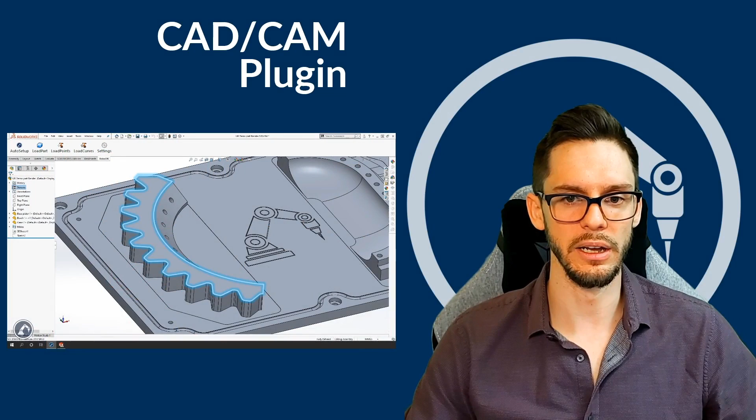So this is great. Here's a small example of how it works. So if you have the part, you can select whatever feature you want to import, in this case an edge, but as I said before, it can be the part, points, or the curve. Then you import that to RoboDK. You can then manage the tool orientation, approach and retract movements, IO activation, and other parameters. Then you generate the path and upload it directly on the robot controller to be executed just like this.

This is a video I did earlier this year, so you can watch it back on YouTube if you want to see it more closely. And as I said, one of the great things about this feature is that considering that you can import 2D and 3D sketches, you can pretty much draw any path you want on the part in your CAD software and import it to RoboDK. In my opinion, that gives you a lot of flexibility to create some fancy robot trajectories.

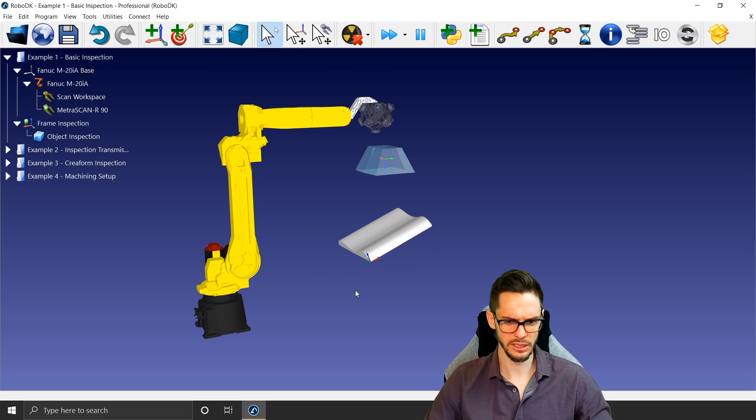So here's the task for this one. Let's say that we want to inspect this simple part. One way of doing that will be to manually create robot targets, right?

You come here, you reorient the tool, you say okay, just like that, somewhere like this, and I'm just gonna create a first target, then I'm gonna go forward, then create another one like that, and so on and so forth. But that won't be super fast and that won't be super precise either. So there's a better way to do that. So let's bring the robot back to home.

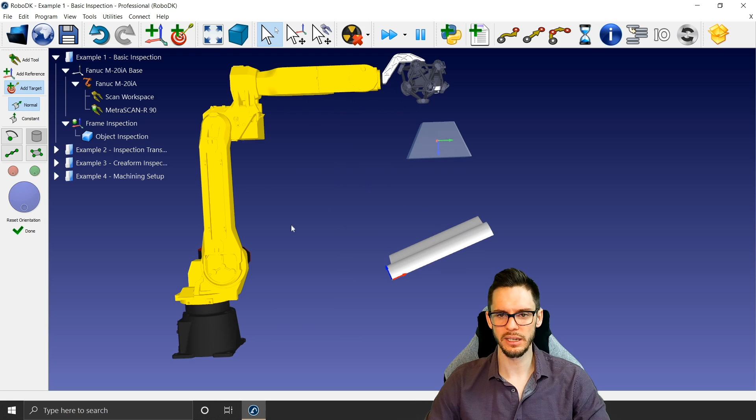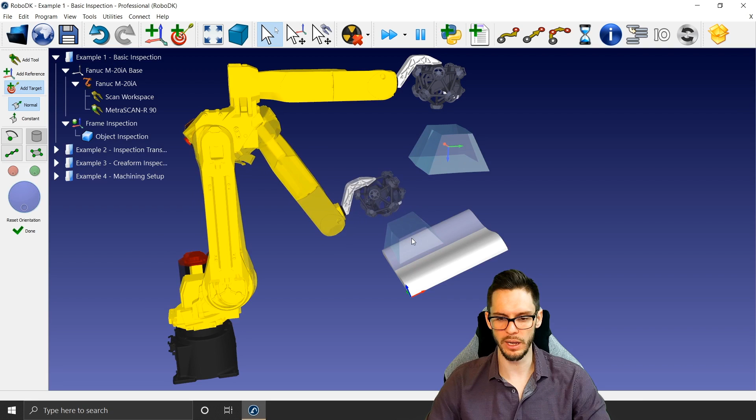Okay, so if you go in the main menu and you click Program, and let's say Teach target on surface, by default, these two options will be activated, so add target and normal. So we'll stick to them for the moment. You'll see as soon as I bring my mouse on the surface of the object, some kind of ghost robot and ghost tool will appear with a small TCP at the end, and as you can see, it always tries to keep itself normal to the surface here.

So if I just click, let's say right there, it created a target. I can click right here. It created another target. You can see those targets created in the station tree like that. I can come here, create those ones like that. And as you can see, in less time than it took me to create 2 targets the manual way, I already created 8 of those, and I'm sure that they are touching the surface and that they are normal to that surface. So okay, that's great.

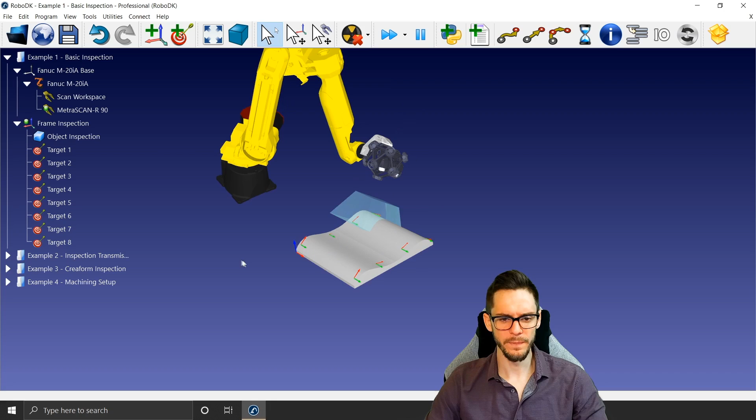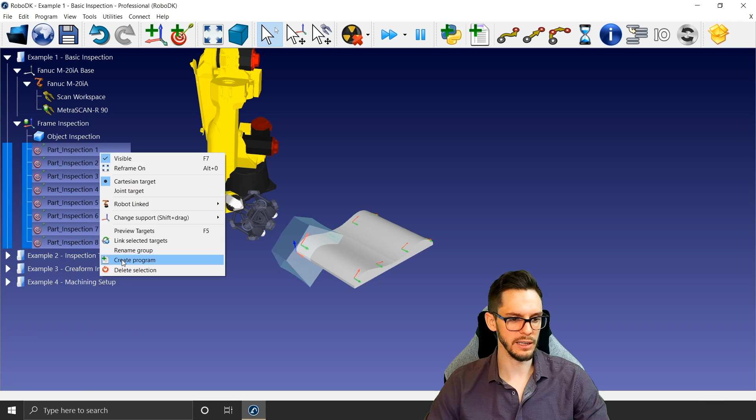Now we can create a robot program with those, so I can select them all. Let's just rename them first. So let's say part inspection. Okay, so it renamed the targets and it gave them a number. And if I right click, I can select Create program, and it will create a program for me. I can right click rename or press F2 to simply give it a name, inspect part, let's say.

And once I have this, I can right click on it and click Generate robot program to generate the real robot program that I need to send to my robot controller. So just like that here, I have the 8 moves that I need to do, and I have all the different positions right here in the registry. So this is an LS file. This is meant to be uploaded on a FANUC robot.

So if you've selected another robot, it will create a different file depending on the robot and the robot controller. In this case here, your robot controller for the FANUC may or may not accept the LS file directly. You may need to compile it to TP, so there's a way to do so.

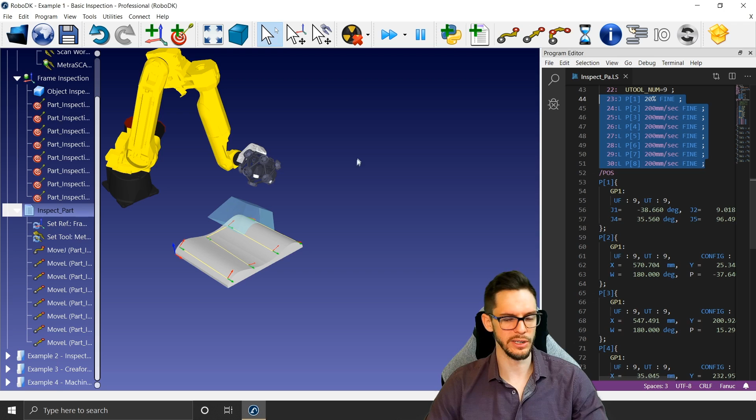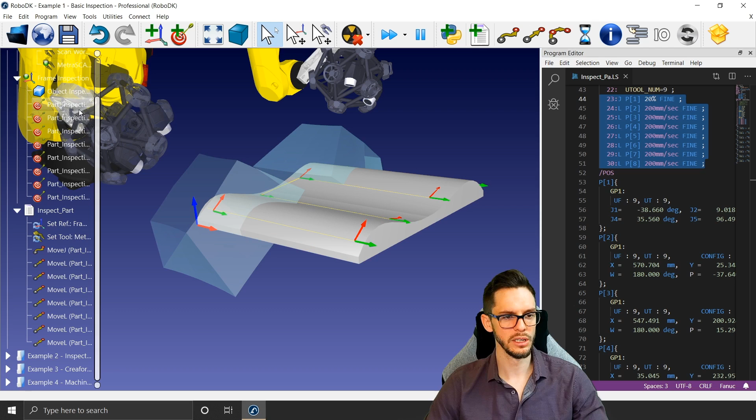Once you created your targets like that, you can modify their position either by holding Alt and using the different arrows to modify their position or the orientation. So this is an option to modify the position. Or let's say if I go to the second position like that, I can also right click on it and click Options, or press F3.

So just like that, I'll have this little window that will appear, and starting from here I can directly modify the values. So let's say that I wanted to have it directly on the edge here. I know that this part measures 600 millimeters, so if I go for 600, the new target is directly on the edge right there. So those are the two ways to modify the targets that were created by this feature. Okay, I'm just gonna bring that to the side.

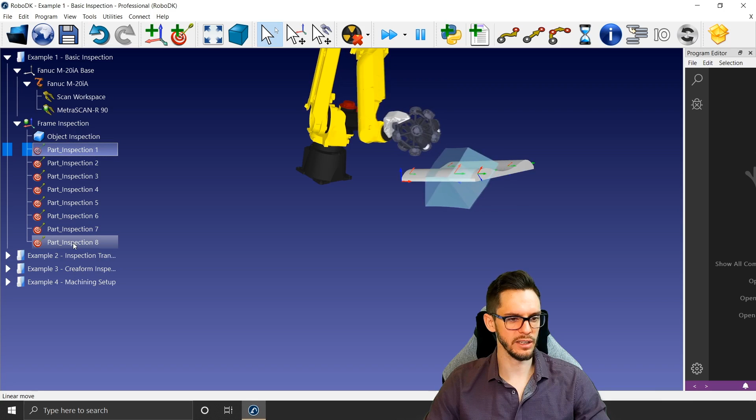So this is fairly easy. So now let's go for a bit more complex example. So here I still have the same robot, the same scanner, and now I have the casing of a car transmission, in fact. And let's say that I need to inspect this side here.

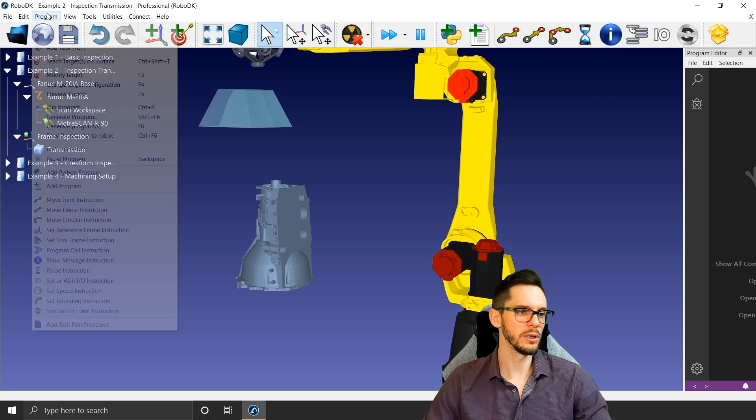So if I go for program, teach target on surface, and I bring the robot here, you can see that, yeah, I'm touching the surface, but the problem is that the orientation of the tool is not right, not even close. So it gives me a strange configuration, and the robot is pretty much like destroying itself.

So what I can do is use my left and right arrow, or up and down, same result, to rotate around the Z axis of the TCP, just like that, and create my new targets. I can create another one here, another one there. As you may have noticed, if you take a look at the other side, the blue wheel here, if I'm using my arrows, the wheel here will rotate. So this is how you manage those.

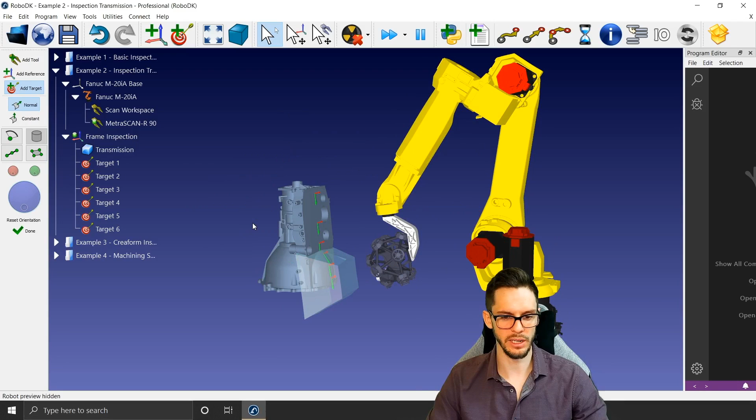The red wheel will manage the rotation around the tool x-axis, and the green one the tool y-axis. So I can create another point here. Again, it will always be normal to the surface I selected. So just like that, I created all the targets I needed to inspect this part here.

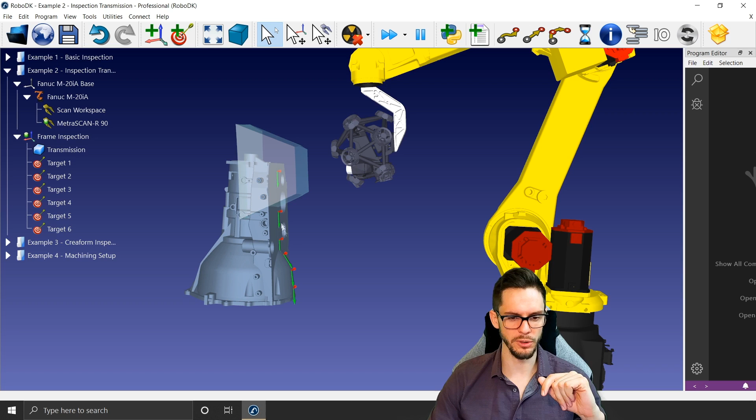But let's say that I do not want to be normal to the surface here. Let's say that I just want to keep the same distance all the time, but that I want to be in the same orientation as this one for the whole inspection. So let's delete all of them. Let's go back to the first one.

I go program, teach target on surface. Here, instead of using normal, let's use constant. So now it will just stay constant to this orientation like that. Even if I click on this surface here, the targets are really on the surface, but the orientation is the same as I defined here. Again, I click done like that, and now I have my program.

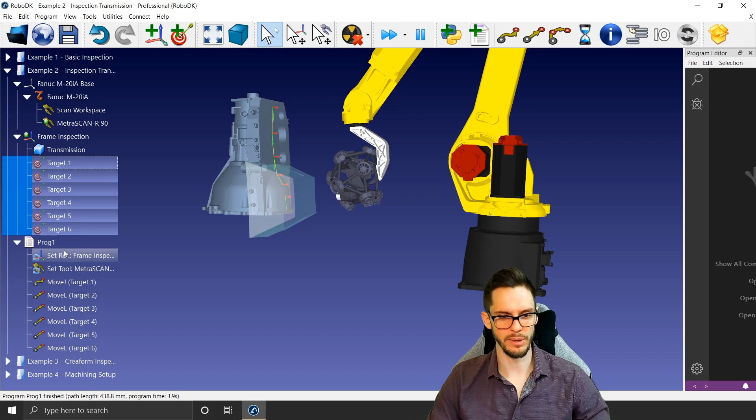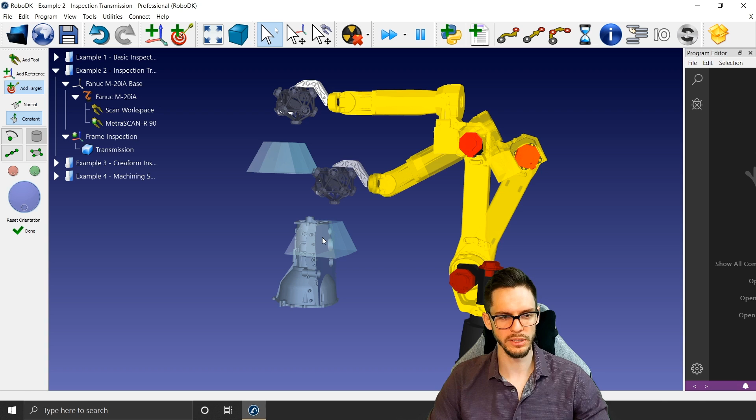So I can select them all, create robot program, and then I have my program just like this. If I delete all of those and I bring back the robot to its home position, so right click home, and I use the same process, so teach target on surface with the constant. Right now, as you can see, it's mimicking the orientation we have right now, so it's not necessarily what we want.

So just a small trick on this one: you just go with the normal for the first one, you adjust the rotation like that, you create your first target, you escape from this feature, this will create your first position, and you know the robot is now at this place here, and you can go teach target on surface again. Now you use the constant method, you create your targets, and then you have the expected result. Okay.

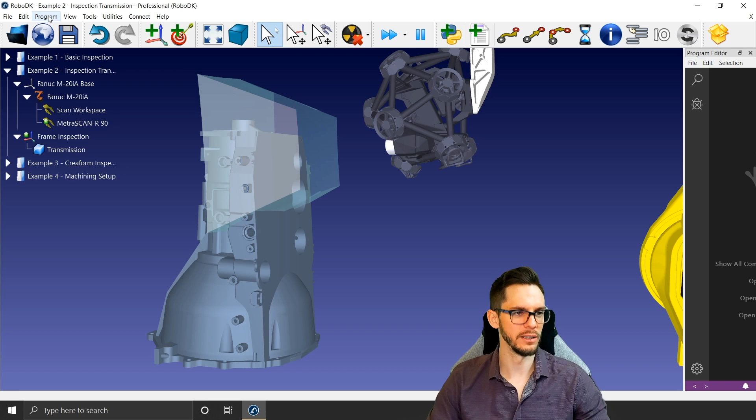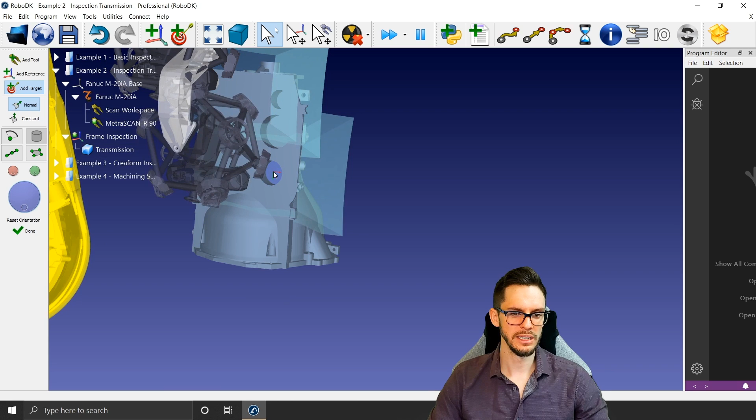Next thing, let's say that we want to inspect those 4 holes right there. So if I go here and teach target on surface, let's say normal, and I try to have a target right there. First of all, it's difficult because it's trying to snap on the inner surfaces of the holes. But even if I'm trying to be right in the middle, it's hard to make sure that you're really in the middle, and you are not keeping a constant distance with the outside surface, but rather with the inside surface, which is not necessarily what you want.

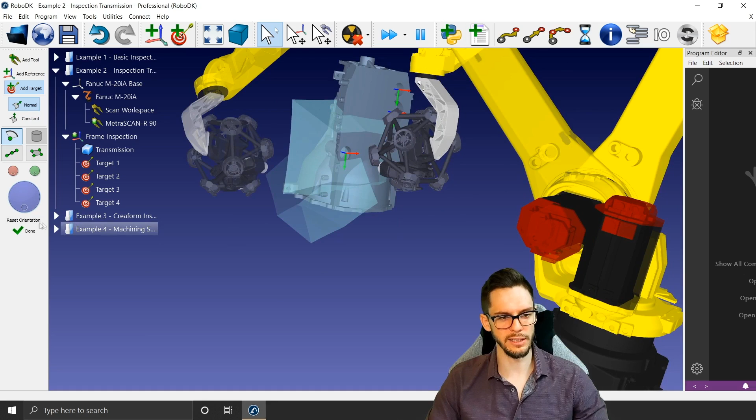So one of the options you can use to avoid that problem is here, the snap on arc center. So if you select that and you come just close to the external arc, you can click, and it will create a target right in the middle, just like that. Again, like that. And let's say here I still have another one to do, just like that here. So just in a few seconds, I was able to create a robot program to inspect all those holes we have here. So that's great, I think.

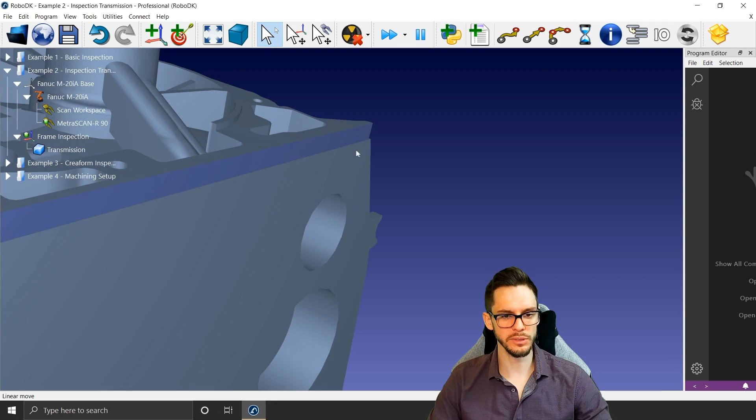Okay. I'm just going to bring the robot back to home. Let's say that we want to inspect this line here and this line there. So if I go back to teach target on surface, I'm going to remove the snap on arc center, and I'm going to use now the snap on curve midpoint and edges.

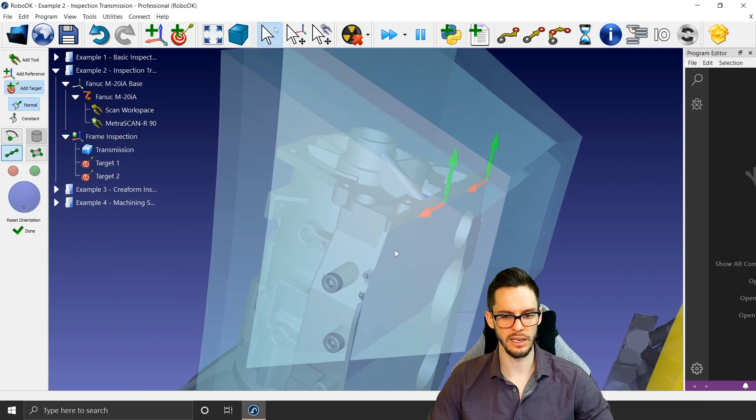This one, as soon as you bring your robot close to an edge, again, you'll see the blue line appearing. And if you're close enough and you press, it will create a target right at the end of this surface. Same here for the middle point of this line, sorry, and here with the end. And let's create the end here, the middle point like that, and the end point just like that.

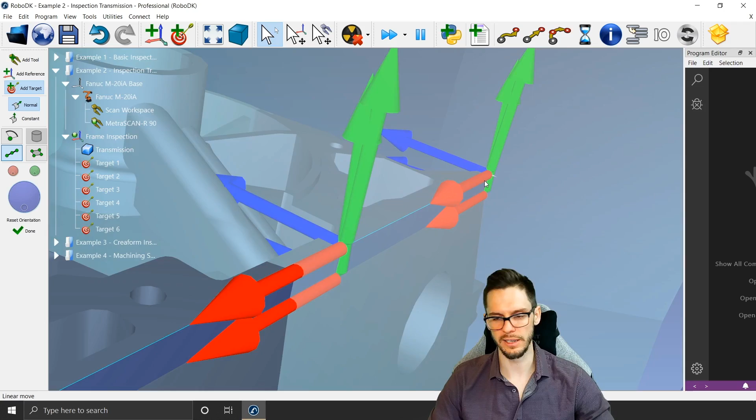Now this one didn't work because I selected the top surface, so right now the z-axis is pointing toward the bottom. So if I just click here instead, that would work like this. So again, I can click done, select them all, and create a robot program. And now, oops, I forgot to rotate my tool before creating the target. So right now I'm not able to go upward as I'm hitting a singularity.

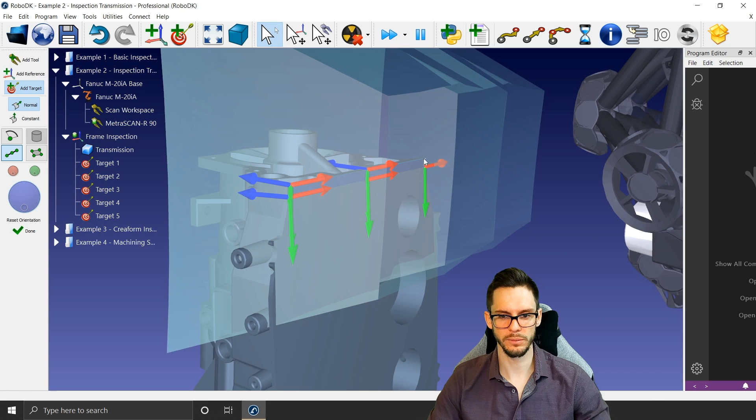So what I should have done is, again, teach target on surface, come here, and then rotate 180 degrees, just like that, create my first target, my second one, my third one, fourth one, fifth one, and then last one. As you see, you don't need to be super precise for it to snap on the end. So if I just create the robot program, now I have the robot program that I required.

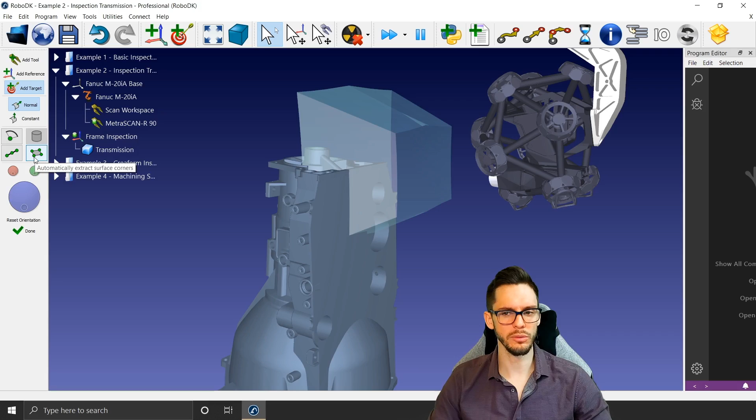Okay. Another option that we can take a look at is automatically extract surface corners. By definition in RoboDK, surface corners are points where 3 or more surfaces meet each other. So here again, I can just snap on the corner. Oops, I didn't activate it. So I can just snap on the corner. Don't need to be super close for it to work. So I could do that here. I could do that there. So for the moment, it gives me the same result.

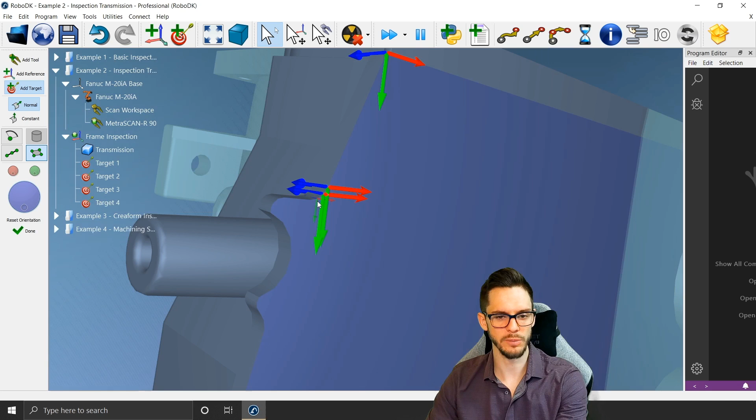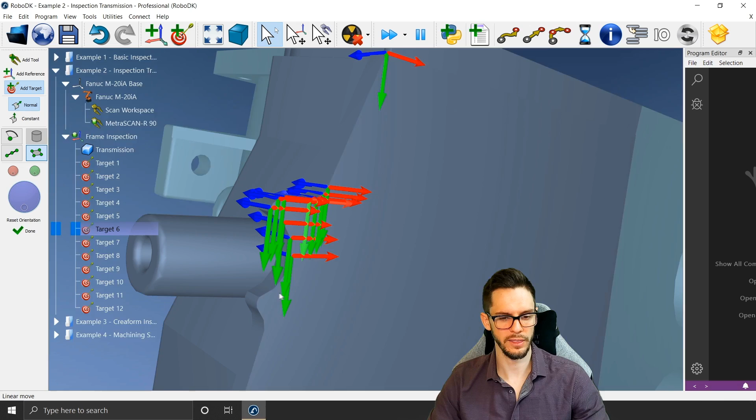But let's say here that I want to have these here. Even if it's a curve, that's pretty much just a bunch of polygons. So here we have another corner. I can press minus a few times if I want to see things in a smaller way and create more targets. Just like that. This one is not right, as I selected this surface instead of this one. I'm gonna go back to this here, like that. Let's say like this, that, and last one here.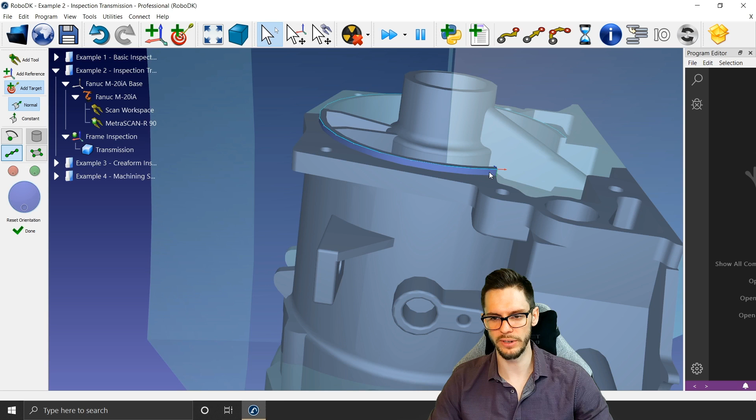So just like that, I created 14 different targets. I can click done, select them all, and then right click, create a program. Yeah, so that works. Perfect. One last little thing that I want to show you here. Let's say that we have those two lines here. They're not super close to one another, but still. So if I come here, it selects the upper line, and I don't need to go very far so that it selects the one underneath it.

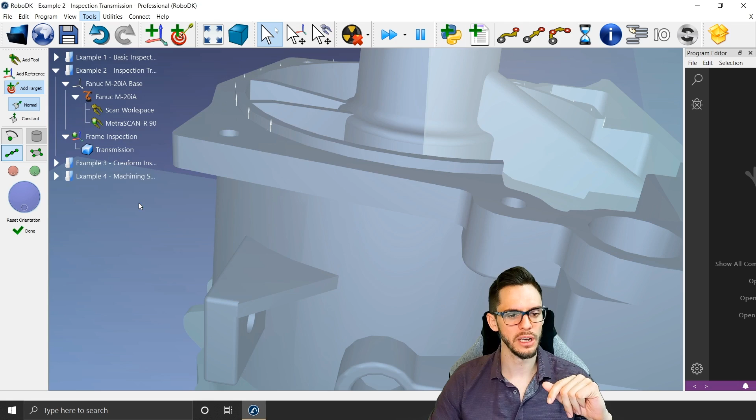I can press plus a few times so that you can see the normals in a better way. So I don't have a lot of room to manage here, and especially with smaller parts, that will become even more complicated. But if you go in Tools, Options, you will see in Display the Pick Curve Sensitivity. So if I bring that to 1 and click OK, now I need to be way closer to the line for it to snap on it. It can be a good or a bad thing depending on the situation. With smaller parts, it's better to have it quite small.

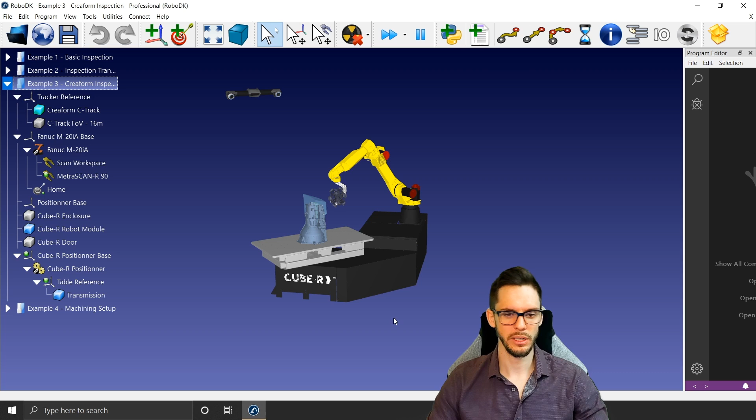I'm going to bring that back to its original value of 10. Click OK, and now we're done for this example. Let's jump to the other one. So again, same robot, same scanner. Now we add the C-Track from Creaform here in Quebec for the inspection. This is an interesting setup, I'm just going to close that here, where the turntable is synchronized with the robot. This way both can move at the same time in a synchronous way.

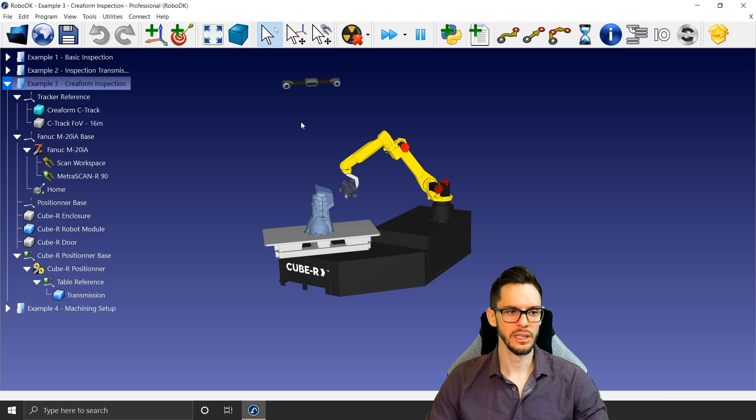And you have here the C-Track from Creaform again. This is here to keep track of where the MetraSCAN is. So when they inspect, they don't need to take into account the precision of the robot. They simply take into account the position of this with respect to the C-Track, and then all the surfaces that are scanned afterwards can relate to this position.

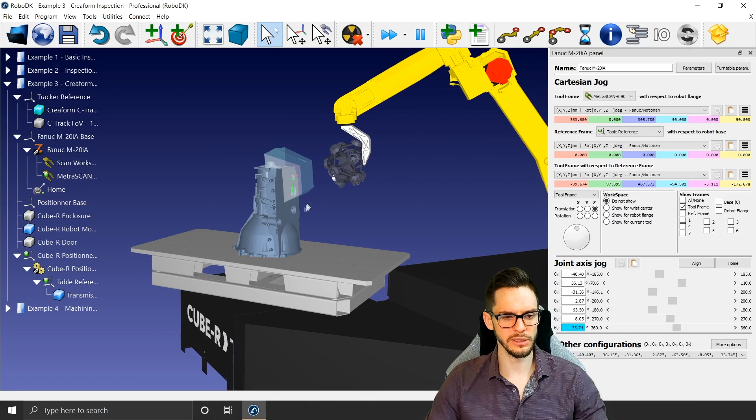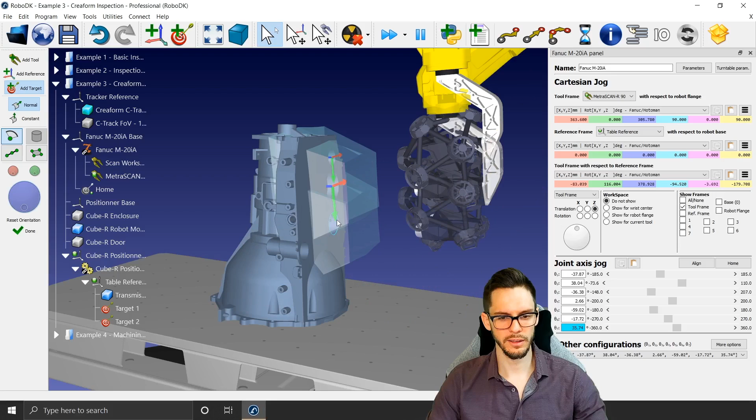So if I double click here the robot, you can see that, like I said, everything is synchronized, so I can move the turntable. The only thing I want to do here is fairly quickly create a program to inspect all the holes we have right there. To do that, again, teach target on surface. I'm going to go for the snap on arc center. I can start from here, go there, there, there, and then let's rotate the turntable a bit. Let's start from the bottom here.

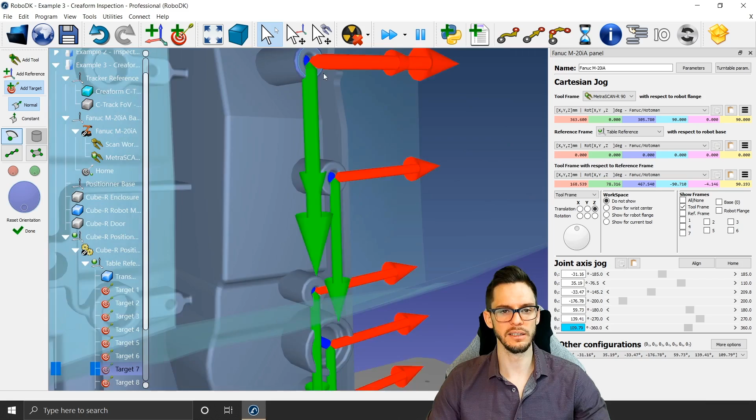Just like that. Oops, this one is not right. I'm just gonna go back to the last one, as it takes the orientation of the position of the robot right now to create the last one. Okay, interesting thing here. As you can see, you don't need to have a full circle. You have just a small portion of the arc that will create the target as required.

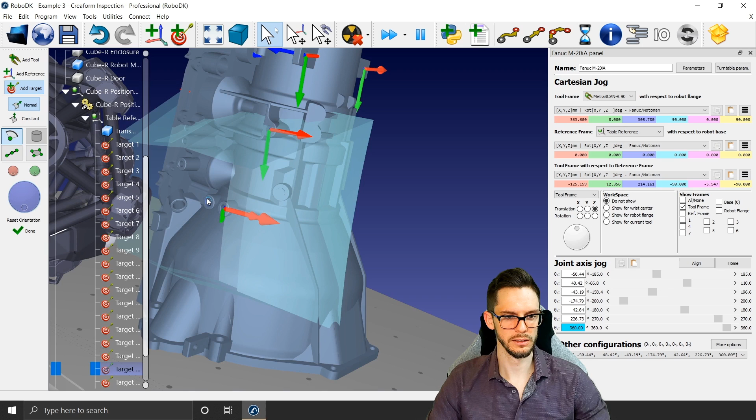So I could go there, there, let's say here, here, here. And then let's rotate that again. There's not so many holes on this side, just a few ones like that. And then let's just do the last side of it. So just like that. Here, this one, this one, this one, and this one. I think we missed one here.

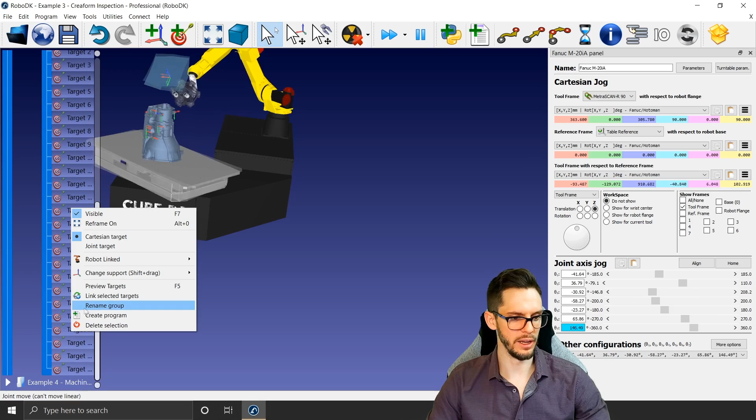And now we're done. So if I go back to a better point of view, I can click done, and I can create a robot program for that. And now it will inspect all the holes I have on the part, just like this. Okay, so that's great. I don't think this one is available. So this is one of the other interesting things you can do with the teach target on surface, but there's more to it.

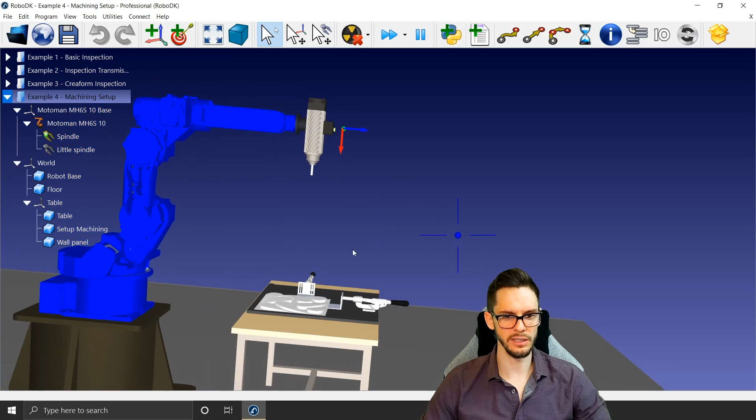So here's the last example. This is a machining setup that I created, like I said, for a tutorial that I released this week. So here, if you remember from the getting started guide, if you want to create, let's say, a custom tool, there's a few things you can do.

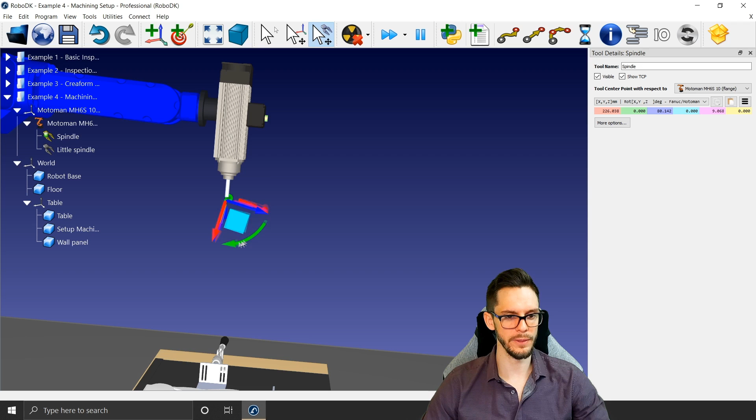So first of all, you import the part, and then you need to set up where the exact TCP position is. So you can either double click on it and then enter the right values right there, or you can eyeball it by just clicking holding Alt and Shift, and then bringing it at the right position. But this is not super precise and not super convenient. So now we have a better way of doing that.

Go to Program, and then again, Teach Target on Surface. Here you have the Add Tool. So the Add Tool will pretty much just create a new TCP. So let's say that I'm selecting the Snap on Arc surface. I can come here, create the tool like this. From there, I have two options. As you can see here, it created a tool snap. So I can just use that for my program.

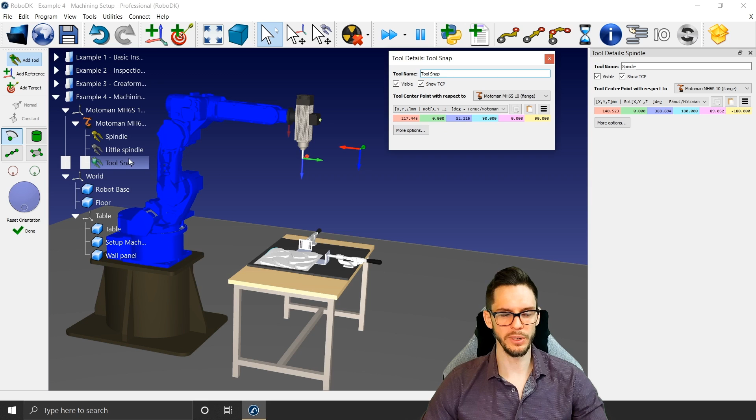Or if I really want to have this value for the spindle TCP, I can open it by double clicking on it. I'm just going to go down here. And then I'm going to copy, here the button copy, and then here paste. And now if I just hide this one, you can see that the TCP of the spindle is still at the right position, like that. So this was quite easy and fast, I would say.

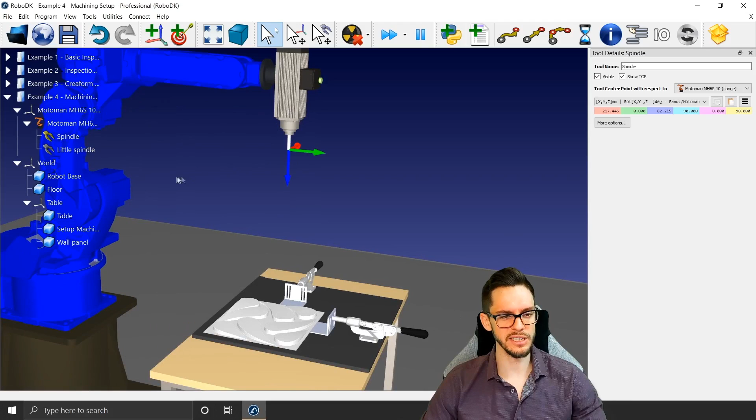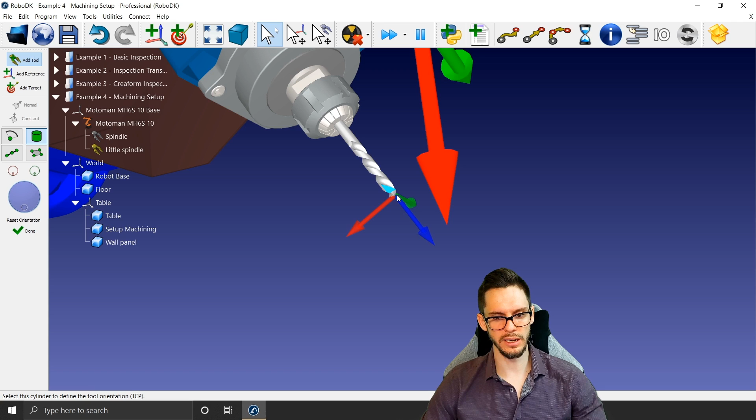But sometimes things are not that simple. So let's say in this example here, I have a drill bit at the end of the spindle. So this cannot simply be snapped to the arc surface because there is no real arc at the end here. So what I can do is, again, Program, Teach Target on Surface, Add Tool, and this time I'm gonna activate the Snap Cylinder axis. So I'll just select this axis right here, just like that. And this way it will keep things along the axis of this cylinder. So here I created that. Without it, I wouldn't be able to do so because of the drill bit helicoidal pattern.

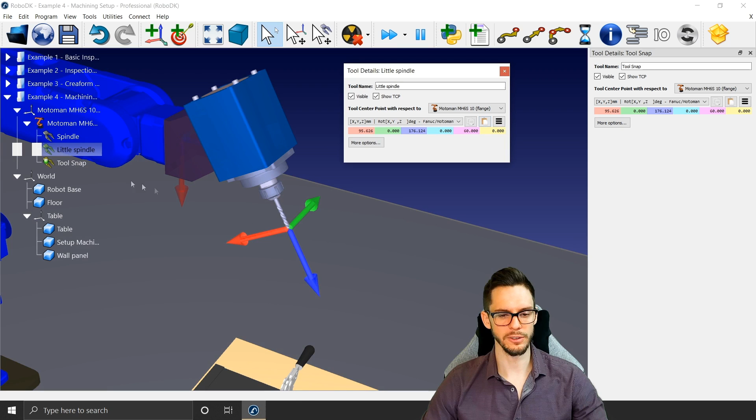And again, I can double click here on the created snap tool. I can copy the value here, open the little spindle, and then paste the value. So both match together. If I delete the tool snap, now I have the TCP at the right position. So this was the first thing.

Second thing is here. Let's say that I have my machining setup and I want to have the origin of the setup right in the corner here. So one thing I can do is Teach Target on Surface, and this time I'm going to use the Add Reference. I'm going to unselect everything here, and I'm going to simply go right at the corner here. If I was here, I could use my arrows to change the orientation of the reference frame that was created, and I can click OK.

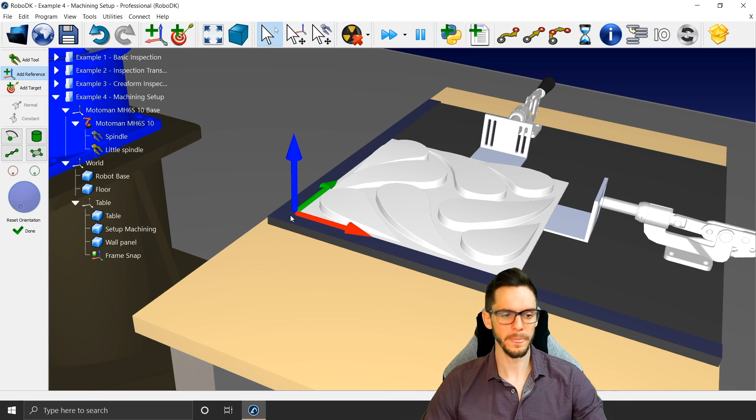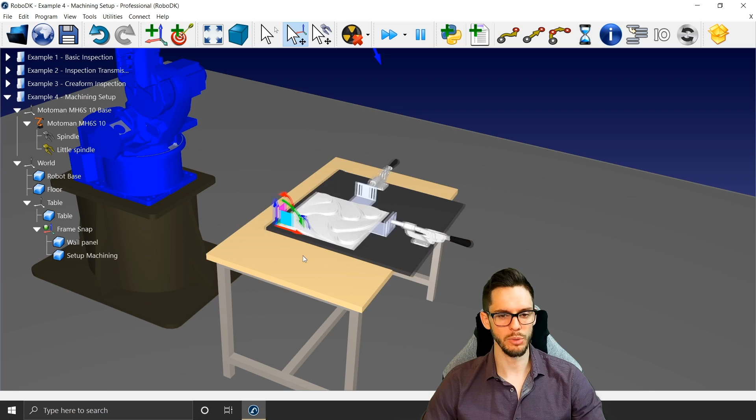And now I'm gonna click done. And now if I want everything here to go inside this reference frame, I can select the setup and the wall panel, right click, change support, and then frame snap. This way they won't move and they will simply change the parent-child relationship between the parts and the reference frame. And now that everything is inside the frame snap, I can move it and everything will follow together. So that's it for that.

Okay, so one last example. I'm gonna go back to the second example I showed you. And this time I won't use the teach target on surface. I'm gonna give you a small demo about the curve follow project. So if you go on utilities and curve follow project, it will create this window here. Let's say that I want to follow the line I was trying to follow before. It took some time to go and select the different points.

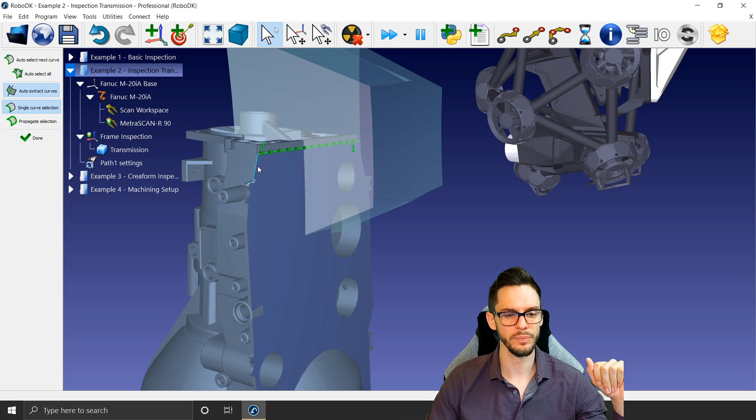But here, if I go on select curve, and if auto extract curves is activated, I can come close to the curve here, and as soon as you see the blue line, you can select, and it will select that curve. As you can see, it will go from point 1 to point 2. Let's say that I want it to go the other way, so I can click switch sense. I can go auto select next curve. Oh no, I cannot because I didn't extract it, so I need to go near here. Click on it, right click, switch sense, and if I go closer, I can select this other part here.

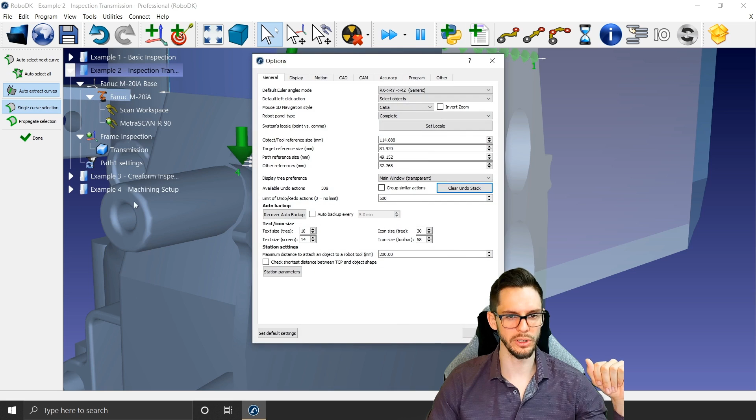As you can see, I'm not able to select this section here really. This is because of the other options I showed you before. So tool, display, and then here pick curve sensibility. If I bring that down to 1, click OK, now you can select the whole lines, and let's do the same here. So now I have this path here.

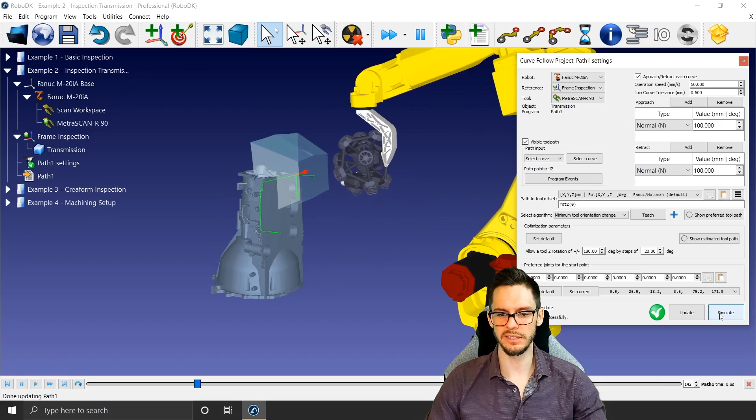If I click done, by default, the curve follow project will create a line following this path. If I update and simply simulate like this, that's interesting. But as you can see here, the orientation of the tool is quite strange. So I'm going to showcase where the TCP is. I'm going to rotate the tool like this. Okay, this is the orientation that I need. I'm going to click on the teach button right here and then update and simulate again. And it will follow the orientation I just taught it.

So again, like I said before, right click, generate robot program. After a few seconds, the window will appear with the generated program for the Fanuc controller with all the points to reach, just like that. All the move commands and all the points to reach below. Okay, so that's pretty much what I wanted to show you guys today. I hope it was helpful.

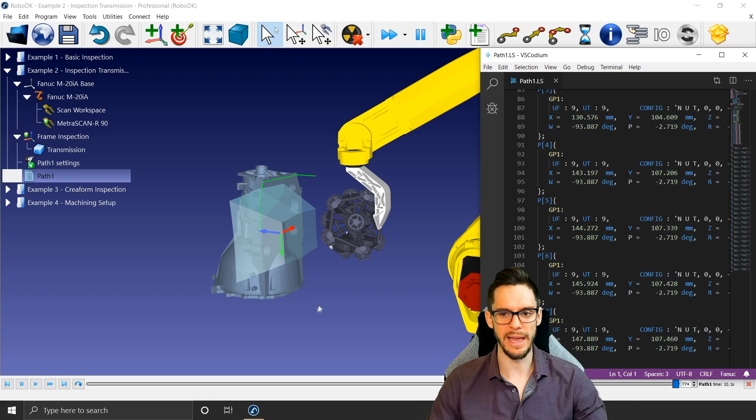Before switching to the question period, I'm just gonna play a small video that I pre-recorded, just the time for me to get a sip of water and take a look at the questions. I'll be back in 2 minutes maximum. Okay, guys. So I'm simply here in a... Okay, guys. So now it's time to... oops. Sorry. Just gonna place that here. I'm just gonna start sharing on this one again. Screen to share. Oh yeah.

So I'm gonna answer a few questions that you had. First one being, is there a way to convert G-code to APT in RoboDK? No, there's no way to convert G-code to APT in RoboDK, but some G-code can be accepted. So I would recommend you try drag and dropping your G-code into RoboDK after creating a station. So just add a robot, a tool, a reference frame. Try drag and dropping your G-code to RoboDK, and see if it works.

If it doesn't, so if it tells you that it's not a known file format, try to use another post processor with your CAM software, and therefore be able to generate the program in another file format that would be acceptable for RoboDK. For example, APT, TAP, NCI, ACL, and a few others.

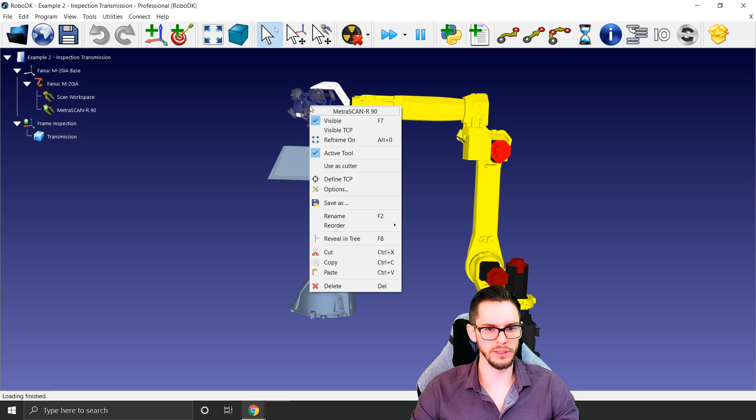How do I tell the robot distance between the product and the robot? So this is a good question. So I'm going to reopen the, let's say, inspection transmission project. So to know the exact distance between the tool and the robot, if you right-click the robot and click visible TCP, so visible TCP for tool center point.

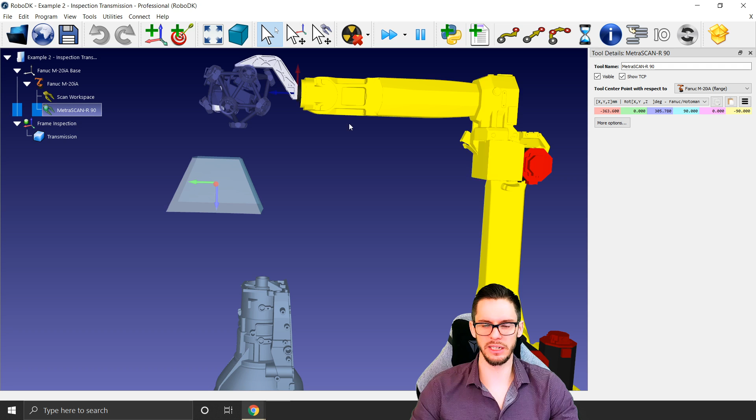So the tool center point will help you, let's say, define the distance between the flange and the TCP or tool center point. So if you double click the tool here, you will see the exact position of this TCP with respect to the flange. But let's say that you really want to have a specific distance between this part here and the TCP right there. So there's a little way to do that.

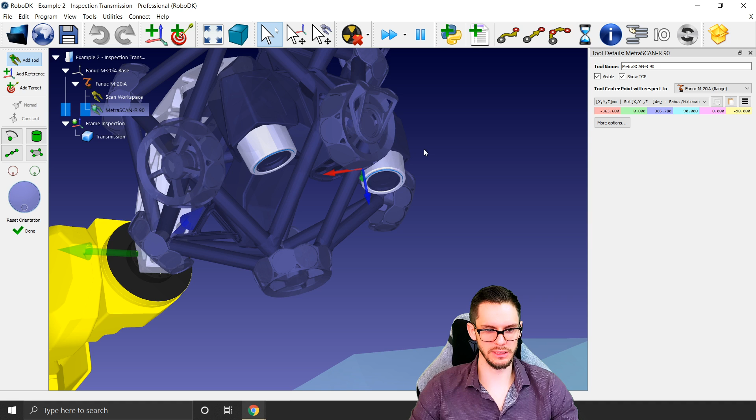So I'm gonna go again, program, teach target on surface. I'm gonna go add tool. I'm gonna snap, let's say here. Oops. I cannot snap here for some strange reason. I'm gonna go just teach target on surface right there. Oh, don't know why it's lagging a lot right now. Okay, so I created a tool snap just like this on the tip of the tool.

So what I can do now is add another TCP. So right-click the robot, add TCP. It will create a TCP by default that will be at exactly 0, 0, 200, like that. But let's say that I want, from this point that I touched, to be exactly 300 millimeters along the z-axis of this one. So I can do two things.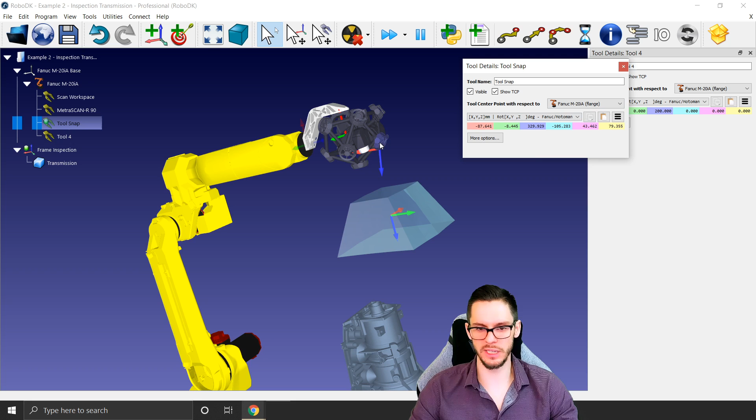So either I double-click the tool snap I created, and instead of giving the distance between tool center point with respect to the robot flange, I could go here and say apply relative move and enter the exact distance that I want to have. So this would be an option. The problem with this option is that as soon as you apply this movement, you won't be able to go back to where you were previously.

Another option would be to simply open the tool you just created at 200 along Z from the flange. And here, instead of center point with respect to the robot flange, you can go for center point with respect to the tool snap we created. You can click here and say reset to put it back to its original position. And then I can enter the 300 here. And now this TCP is exactly at 300 millimeters from the point where I snapped on the surface. So I hope this answers your question.

Let's see what other question we have. Just gonna go back here. Not there. Don't know where my questions are now.

Oh, here. Okay. Cristiano Lima asked, do you have any tips for dispensing to be considered during the offline simulation? So let's say distance between the part and the product. I do not have any tips to give you. That will really depend on how you set up what kind of product, what kind of height layer you want to have, what kind of thickness you want to have. So there's a lot of things that this will depend on.

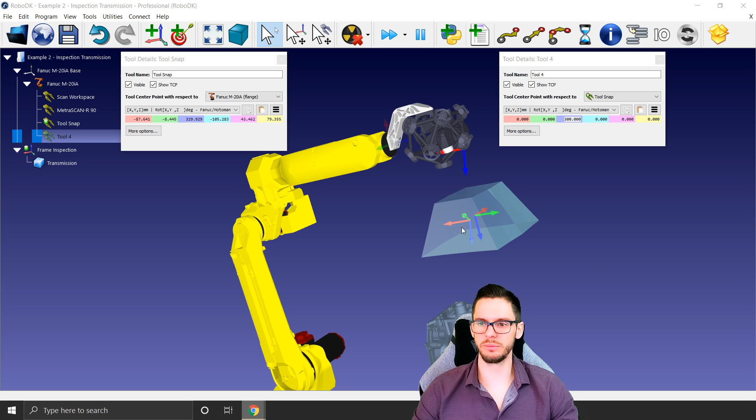Okay, so someone asked me about how the post-processor works. First things first, I would recommend you take a look at our online documentation. In our online documentation, under post-processor, you will see how to select, modify, and so on the different post-processors. So this is where you can learn the basics of post-processors. But if you want to create a whole new post-processor, I would recommend you start from one we already have.

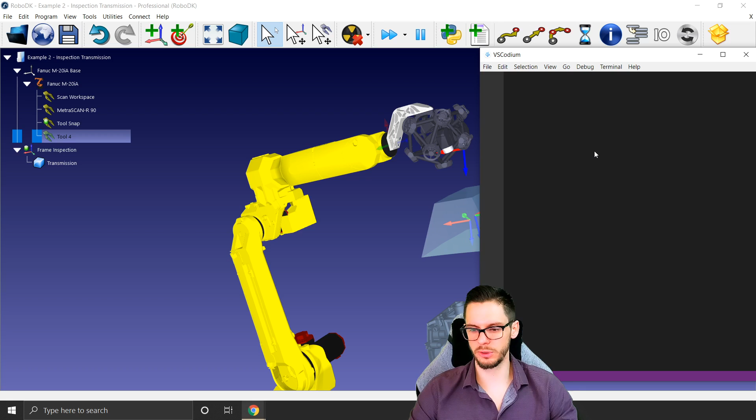So if you go in Programs, you can click Add and Edit Post-Processor. Now you have the list of all the post-processors. So let's say if I select the one we were using right now for this robot, this window will appear after a few seconds. Okay, here it comes. So this is the post processor.

So pretty much it's a Python file that will be executed to translate what RoboDK creates as a program here into the robot-specific syntax or language, if I can say. So if I just go Control F and look for move L, or the move J, let's say the move J is quite easy.

So if we face a move J in RoboDK, the post processor for the FANUC robot in this case will convert that into J, and then the line with the position, and then joint speed, and then the CNT value, which is pretty much the rounding. So do you want to have a continuous or fine movement between the points? Just like that. Same here for the move L.

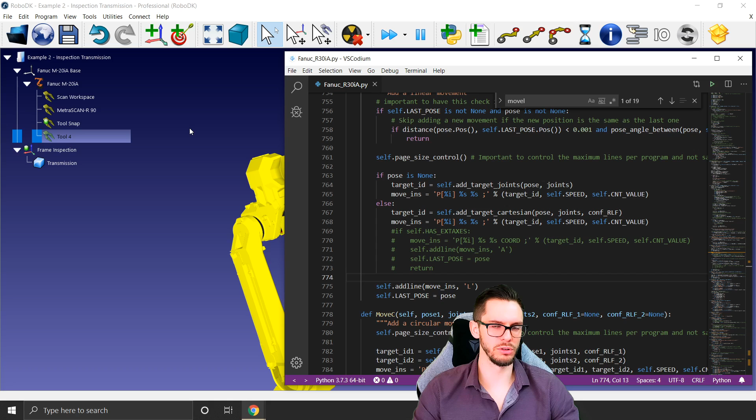So it will create L with the value of the point again. So target ID, the speed and the count. This one is not necessarily the easiest one because FANUC uses registers to manage the points. But let's say I go for one that is a bit easier in my sense, so let's say ABB for RAPID.

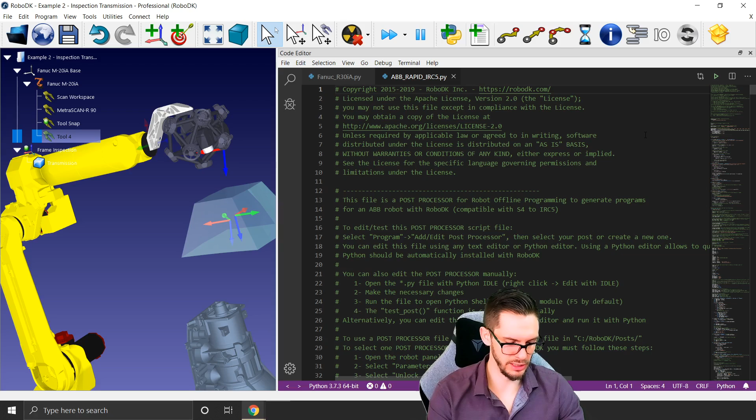If you come here and Control F again for move L. A move L here is fairly simple. So when we face a move L, we will add MoveL with the target as the first variable, the target values, speed data, zone data, tool data, and work object data. So my recommendation would be to start from an existing post processor and work your way from that.

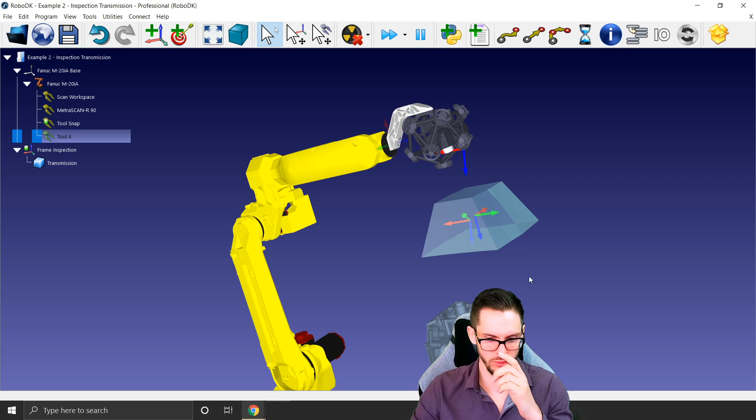Okay, next question. If the curve is closed, is there a way to specify the start and ending point of the closed curve? That depends. If the curve is just like a circle, there's no real way to decide where to start. But let's say here, if I delete those two here, if I go utilities, curve follow project, and I'm going to extract one of these here.

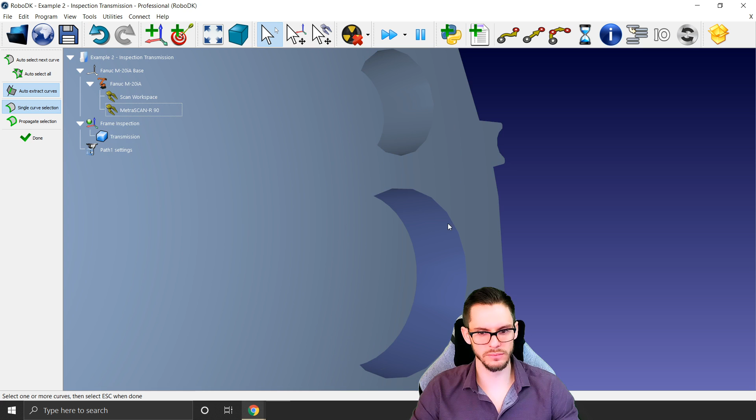So select curve, extract this one. So now I have the curve, but it's impossible to know where it starts and where it ends for the moment. But now that I did that, it extracted the curve. So if I go just on top of it, you can see the curve.

You can right click on it and you can split the curve. You can split it in half, where there's corners, or split at length and just give a number of millimeters where to split. So if I split that in half, I now have this half and this half here. I could do it again. Split curve, split in half, and then split in half.

And then you can come here again, utilities, curve follow project, select curve. I don't want to auto extract this time, so I can say, okay, I want to start from here. Oops, my bad on this one. So I want to start from here, and then I want to go there and there and there.

But honestly, the best way to do that, if you really want to decide where you want to start, would be to use one of our CAD plugins. So with the CAD plugin, you could literally just draw the path as an arc instead of drawing it as a circle. So if you draw an arc, you will be able to decide where the points start and where it ends. Okay.

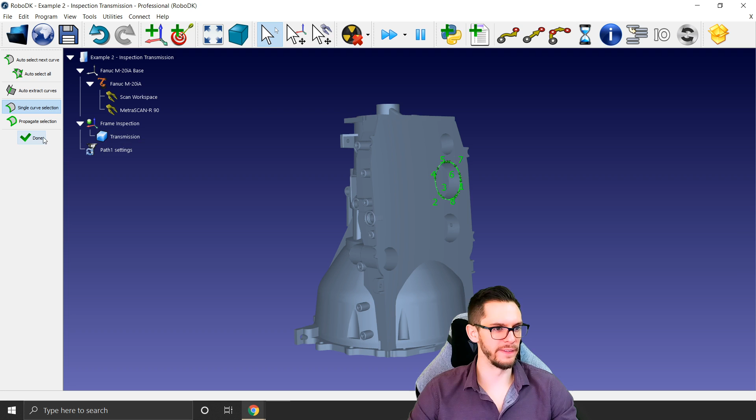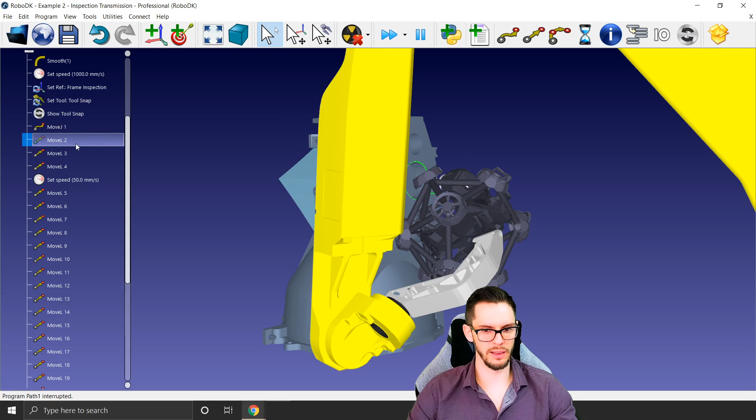Is there a way to display the targets created by the curve follow project? There's a way. It's a bit hidden, but there's a way to do that. So if I just update this path here, I have the program created here. If I right click, not display path, my bad, show instructions, it will showcase all the moves that need to be done like that. Don't worry too much about the orientation here. I didn't manage this one.

If I bring back the robot to its home position like that, now I can select all these points here. Right click, select targets. That will create a bunch of targets, as you can see right here, so you could modify those values individually afterwards. Now obviously it's not super cool to see because I have the robot in front of me, but now you have all the targets right there.

Okay, do I have any other questions here?

No, perfect. Okay, and just let's see if we have questions on YouTube. Okay, there's no audio. Oh, sorry, I'm so sorry. I forgot to start the audio on Webinar Jam. That's a bummer. I'm sorry for that. That's my mistake. Yeah, I should have thought about it. Oh dang. So yeah, you could have listened to the answer on the other, and yeah, my colleague told me that I was not listening. Okay. And if there's any question here,

If you want to add a robot to RoboDK, it's fairly easy. You go to Tools, Utilities, Model Mechanisms and Robot, and you can select the 6-axis industrial robot, just like that, right here. And you just need to insert the different parts. Now it's just using transmission everywhere because this is the only part I have in the station. But generally speaking, you can add the base, joint 1, joint 2, joint 3, joint 4, joint 5, joint 6. And then you just enter some of the DH table parameters, you can easily find those from the datasheet of the robot. Okay.

Okay, I think that it's... Do you have a plugin available for Solid Edge? I'm not supposed to talk about that, I think, but it could be maybe the next one we will release. I don't know. Maybe yes, maybe no. That's your choice to figure out. But I would say that if you stay tuned to our YouTube channel and our newsletter, you have a good chance of maybe finding a plugin for Solid Edge in a short time.

Is there any other questions that I missed? Okay. I think that's pretty much it on this side. Like I said, I'm super sorry for the few problems we had.

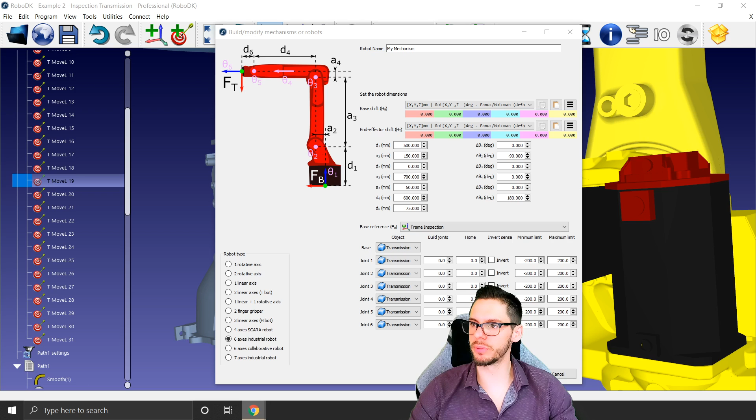Is there a way to export a bunch of targets to a text file? So I don't think that it's possible to export targets, but it's possible to export lines though. So if I just delete that here and delete all this here, delete this program here, right click and move home. When you come closer to the line, you can right click on it and you can export the curve. It will create a CSV file with the curve. So if I save that here, it should be on my desktop somewhere, just like that. And now you have the XYZ IJK vector of the curve exported. So you can have the values right here.

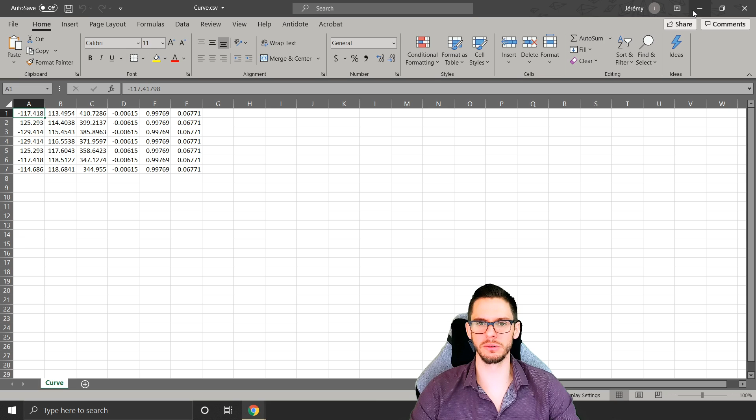Do you have an example for cobot welding? Not really, because there's not really a difference between cobot welding and robot welding in general. The only real difference is that usually industrial robots have included features that will let you manage weave and, let's say, every parameter of the weld included in the robot controller. This is not always the case. I'm not aware that it's the case with cobots, to be honest. So therefore, you would have to create these parameters manually to create your little weave if needed. But if you just need to follow a line, you will simply follow a line as usual.